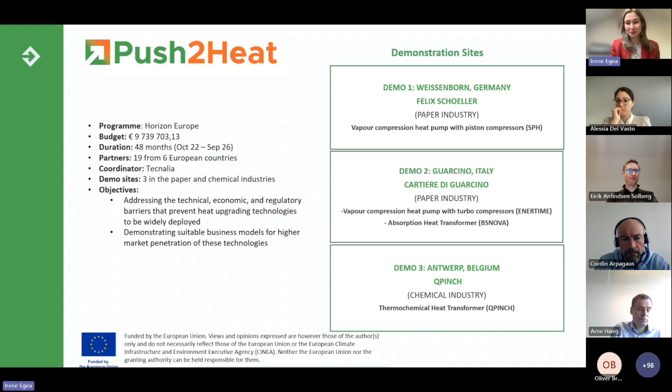So last but not least of the projects that are organizing this event, I am talking about SUSHEAT, which will last 48 months. It's the youngest of the projects, I would say. It started in May 2023, and it has 14 partners from different European countries, including affiliated countries of Norway and the UK. And the coordinator is UNED.

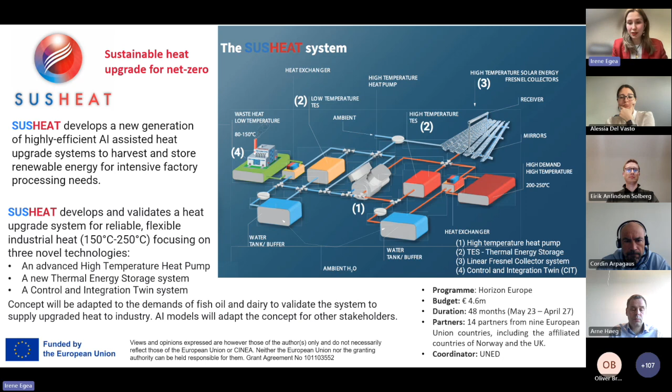And now, yes, the time has come to let the speakers start speaking. So I'm glad to introduce the first speaker of today, my colleague Alessia Del Vasto. Alessia graduated with a Master of Arts in EU Public Policy and Administration at Maastricht University. Prior to joining EHPA, Alessia worked at the NGO Positive Money Europe, dealing with central banking and sustainable finance for over 3 years. Previously, she worked at the European Economic and Social Committee and at the European University Institute in Florence. And she joined EHPA in June 2022, covering policy and lobbying work with a specific focus on refrigerants. So Alessia, whenever you're ready, the floor is yours.

Great, thanks, Irene, for the introduction. Very glad to be here today and discuss with you what the EU is doing or not doing on the policy side. Indeed, I am focusing on refrigerants, but recently I have been joining the industrial heat pump group of EHPA. So I have been chairing the group, etc. So that's why I'm here. I'm gaining more and more knowledge on the topic, and of course it's extremely interesting, and it's gaining more and more momentum, as we will see later.

I wanted to say a few words about EHPA. We are 24 years old, and we have 220 members across 30 countries. So not only the European Union, but also beyond. So we have a few members from the UK, Turkey, Norway, and Switzerland. We're based in Brussels, working with the EU institutions, advocating for heat pumps, but also cooperating at the international level with the Chinese Heat Pump Association, the International Energy Agency, and so on.

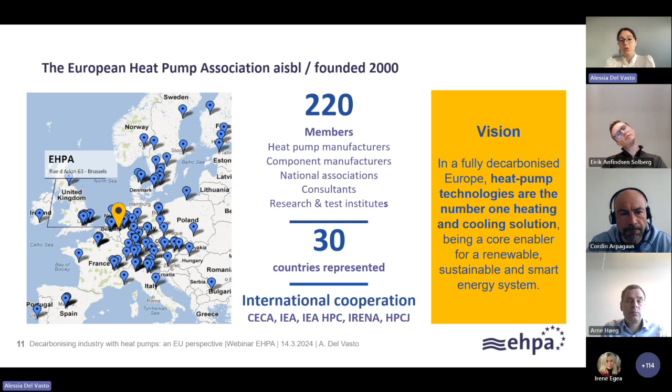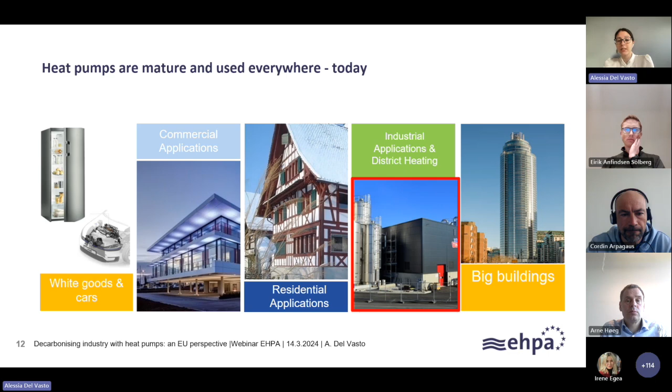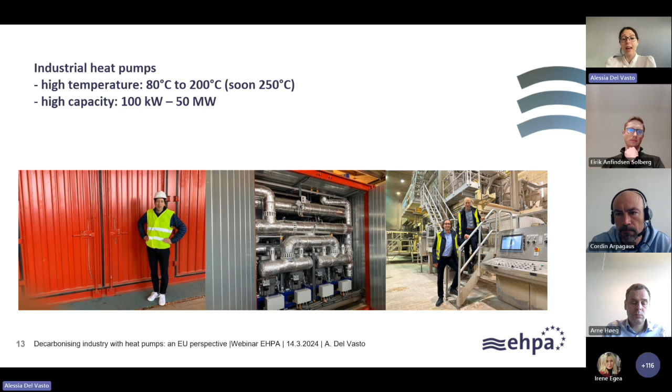So now everyone knows heat pumps are mature, let's say, and they're used everywhere, not only in white goods, not only in cars, not only in commercial applications, office buildings, commercial buildings, residential buildings, but also in industries, also in factories and so on. And that's what we're going to talk about today. We know they have reached quite high temperatures, soon 250 degrees, as my colleague Irene was saying. We have high temperature heat pumps that reach 200 degrees, very high capacity from 100 kilowatts to 50 megawatts. So it's pretty great and helps decarbonize the industrial sector.

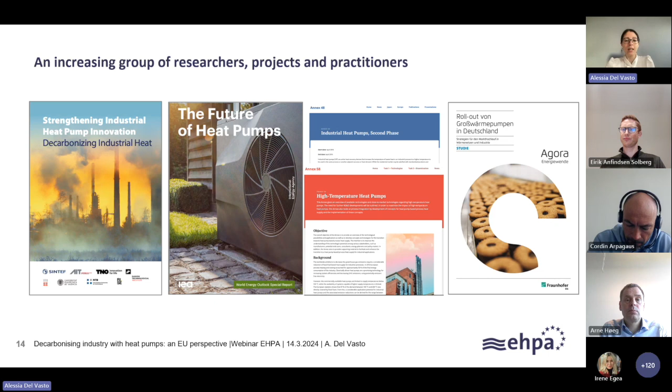Indeed, as I was saying, we're gaining more and more momentum. Everyone is talking about it, not only researchers. So there's of course a lot of focus from academics, but policymakers are also getting more and more interested in that. The IEA, you can see here, wrote a report on the future of heat pumps, and the World Economic Forum recently published an article as well on decarbonizing the industrial sector in the EU via electrification. And of course, there is a huge focus on industrial heat pumps, on the role that industrial heat pumps can have in decarbonizing the industrial sector.

So as we know, industrial heat pumps and residential heat pumps in general work with an energy cycle. And what we talk about here is that we need to close the energy cycle, and we need to make sure that waste heat is available in sufficient quantities and it's actually reused in commercial processes. It's not wasted, as the word says. It's used in new buildings, as well as in process design.

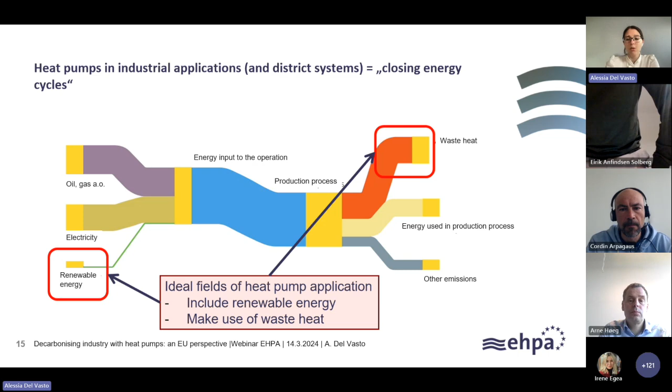And when we talk to policymakers, whether at national level or at EU level, what we want as EHPA is that waste heat is taken into consideration and it's finally seen as an opportunity. We will see later what we mean about that. So, let's talk about what the European Union is doing with regard to industrial heat pumps.

Maybe it's worth it to mention first the EU Energy System Integration Strategy, which was published back in July 2020. It was accompanied by a consultation with stakeholders, including, of course, the heat pump industry. The strategy says clearly, industrial heat pumps can help decarbonize the low temperature heat supply within industries and can be coupled with waste heat recovery. There's a mention of waste heat, of course.

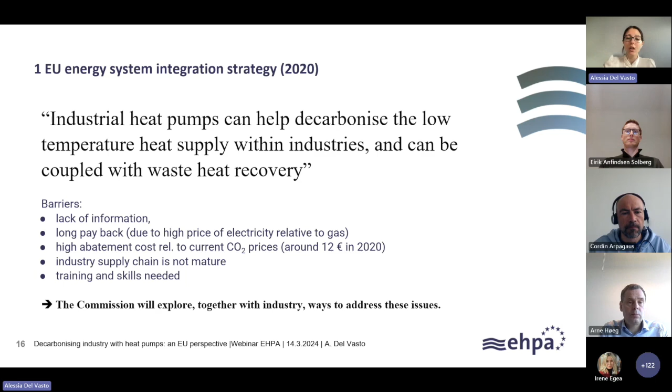And the strategy also acknowledges a few barriers here and there. The lack of information, long payback, training and skills are needed in order to step up the rollout of industrial heat pumps. As EHPA, we talked about training and skills a lot. We talk about, of course, accelerating the rollout of heat pumps. But in order to do that, you need well-trained and skilled installers. You need to carry out a few policies in this regard, and one of them is making this job attractive to the population, to young people, etc.

So one of the greatest recognitions for heat pumps, including industrial heat pumps, came last year with the Net Zero Industry Act. Heat pumps are recognized among the key clean technologies to carry out decarbonization in Europe. This was quite a big recognition, which led also to us handing over our heat pump accelerator report to the European Commission themselves.

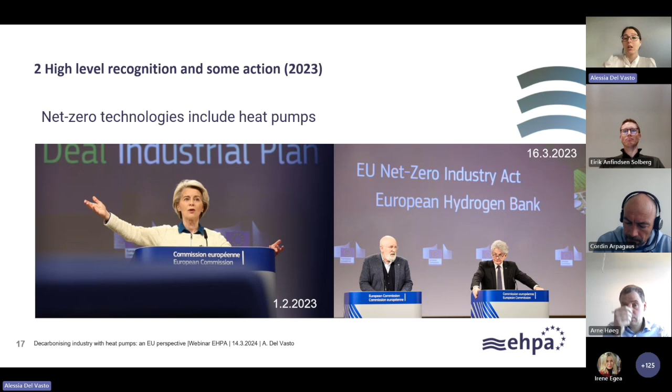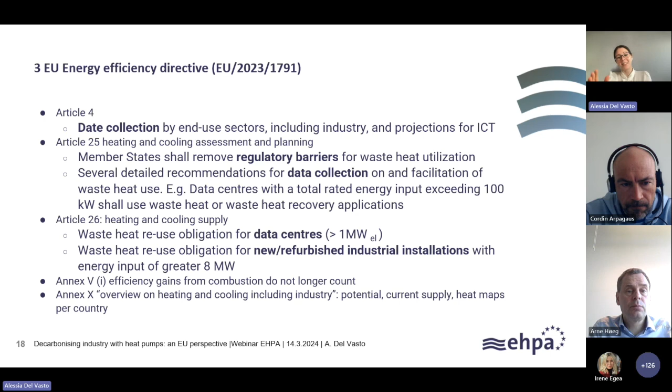And it's worth mentioning as well the EU Energy Efficiency Directive, which goes a bit further and focuses on data collection by end-use sectors, including the industry. It goes to the planning. It says clearly that member states should remove regulatory barriers for waste heat utilization, etc. So it goes a little bit further, and indeed, it was a step forward in recognizing the wasted opportunity of waste heat recovery.

The Renewable Energy Directive instead created a legal framework at the EU level for the development of clean energy all across the EU economy. The EU really wants to be a global leader in developing renewables. In 2022, the share of renewables was around 23%. The goal is to bring it to 42.5% by 2030.

In the recitals, it mentions the opportunity brought by industrial heat pumps, how they can help decarbonize the sector, at least when it comes to low temperature below 200 degrees. Member states are invited to promote electrification via industrial heat pumps. And once again, it's said very clearly that waste heat is underused. Its role in a wider framework is to mainstream renewable energy in industry, but also in Annex 4, it's clearly said that training should be adapted to the requirements of industrial installations. As we were saying, this is key to carry out the rollout of industrial heat pumps.

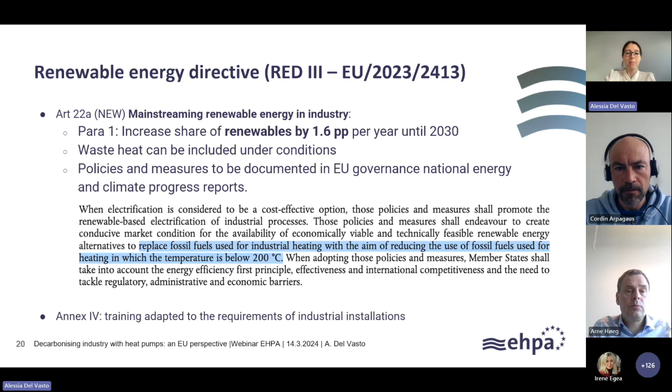And it's clearly said once again that we should replace fossil fuel use for industrial heating with renewable energy, and with industrial heat pumps when it's possible. The directive also mentions that member states should track the progress in specific reports that are then handed over to the European institutions, so that we can see what went wrong, what went right, and track the progress for every member state.

Now it's time to talk about the F-gas regulation. Let me talk about it for a few minutes, because it's particularly relevant at this stage. You probably know the F-gas regulation was published at the end of February and came into force this week on the 11th of March. So indeed, it's quite relevant. Everyone is talking about it. There are a few aspects that have been clarified. A few others have not been clarified yet, and will be clarified through implementing or delegated acts throughout this year, probably even before the summer break. As EHPA, we are closely monitoring these developments on the F-gas regulation.

What's new in the F-gas regulation? The HFC phase down is steeper than in 2015, and the objective is to reach zero HFC by 2050. You know, the EU has to reach climate neutrality by 2050. So eliminating HFC should be read as an objective of the EU in the wider framework of climate neutrality, so to say. There are new prohibitions, of course. We will look at them in a minute.

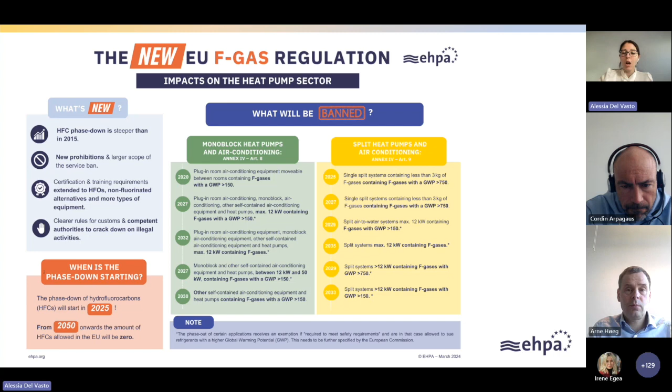There are exceptions in case of safety, but this needs to be further clarified, considering all the differences across member states regarding safety exemptions and the use of specific refrigerants under specific conditions. We have identified a few barriers already: knowledge and trust, the lack of infrastructure, and complex integration, integrating energy carriers with the key technologies, etc. That's particularly important as well.

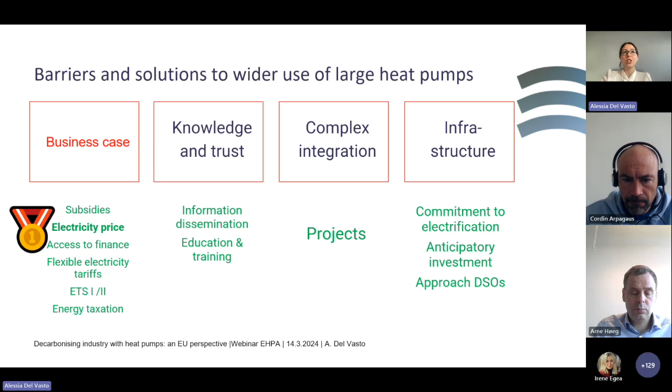But what I want to conclude this presentation with is electricity price. We really believe that at this stage, the price ratio between electricity and gas must absolutely come down. EHPA specifically calls for the price of electricity to be no more than double the price of gas. We support carbon pricing and policy instruments that in general shield citizens from electricity price spikes.

We need to make sure that for industry, citizens and consumers, heat pumps become a rational choice from the economic point of view: reduce the electricity and gas price ratio, but also reduce upfront costs, boost financial tools to reduce such upfront costs and make it easier to access loans, green loans, renovation loans, subsidies, etc. We have identified barriers, but we also offer solutions.

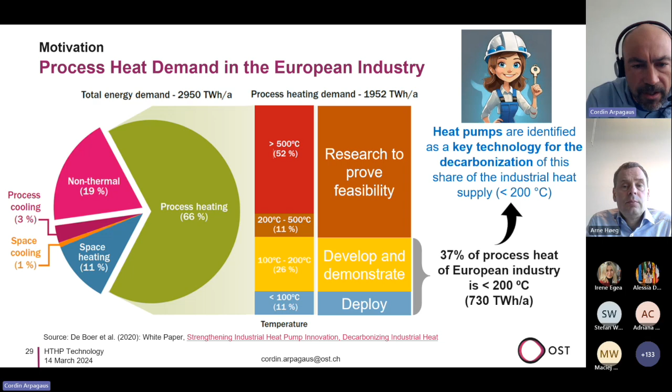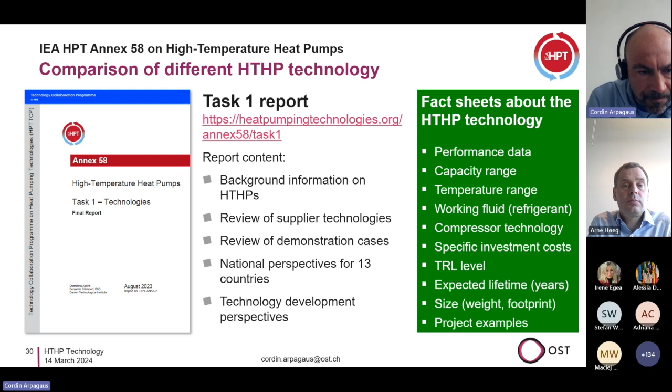So it's around 37% of the process heat. So heat pumps are a key technology to decarbonize industrial process heat, just as an important fact. So then we have IEA Annex 58, where we participated also as a Swiss university. There were several countries participating, and we are developing task reports. And the first Task 1 report is about high temperature heat pump technology. This report is available for downloading, and it has very valuable information, and I will use some of it for today's presentation.

I generated this slide here. It is an overview of many heat pump suppliers which are now active in this market. The left graph is the illustration of the temperatures that can be achieved as a function of the heating capacity, and in color the compressor technology. So you can see these machines are providing heat higher than 100 degrees, up to 280 probably, when we include as well vapor recompression technology, so open cycle heat pumps. So the message here, the market is evolving. I would expect probably 5 new companies every year.

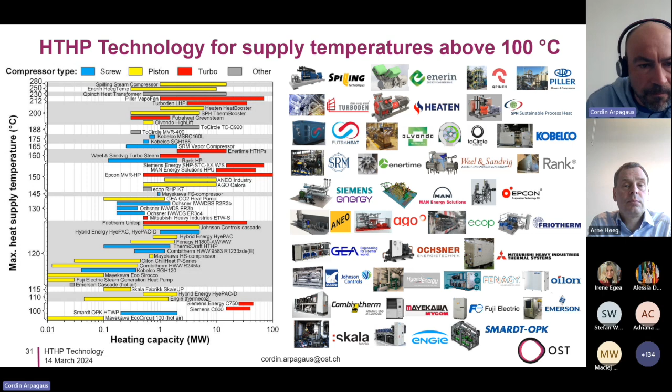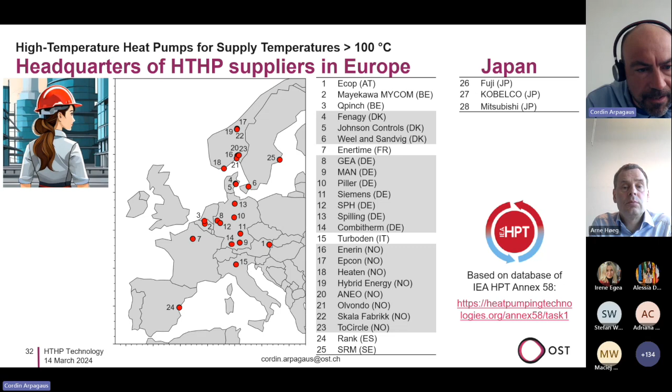The companies are located in different places with headquarters in Europe. You can see here main companies in Norway or in Germany and some other countries. And for sure, there are others around the world which were not participating in this Annex project. Important is the technology readiness level as a measure of the maturity of the technology. For high temperature heat pumps, we also see such a distribution of the products in these technology readiness levels. Readiness level 7, 8, 9 is very close to commercialization. And here, the heat pump suppliers are pushing their products towards higher TRL level.

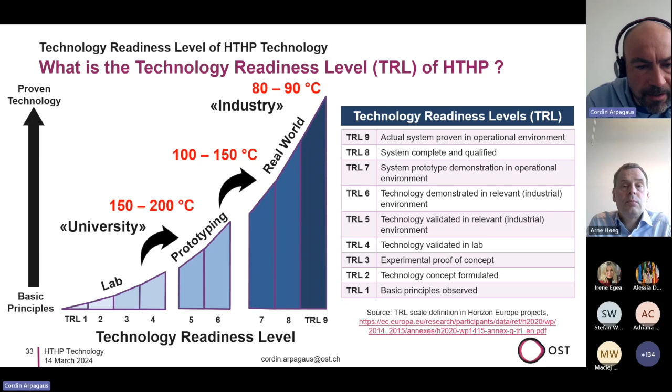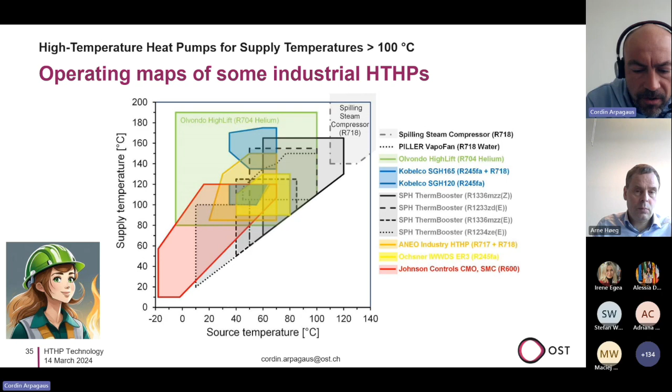Important for an end user is the operating map. And here we have some of these operating maps illustrated as a function of heat source temperature and heat supply temperature. And you can see there are several products which can provide, let's say, 120-degree heat from a waste heat of 50. So here you have quite an overlap of operating maps, which is an interesting spot and an interesting range for various applications.

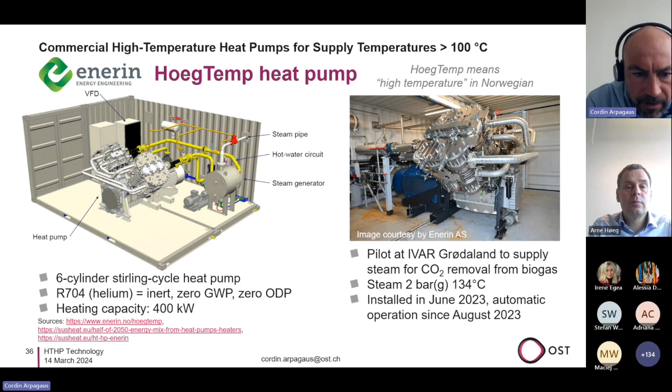I have now 3 companies I would like to focus on a little bit more. Enerin, we have Arne later on with a presentation. The interesting thing of the HoegTemp heat pump is that it is working in a Stirling cycle with helium as a refrigerant. Helium has the advantage that it is a noble gas with no problems for the environment, no ODP, no GWP. So this technology is close to market. On the right, you see a demo pilot installation in Norway to remove CO2 from biogas. They need steam. So this machine is producing steam at about 2 bar gauge, 134 degrees, and it is now running and in operation.

Important is that the machine is isolated. So you see here the isolation for the compressor, and at high temperature, the waste or the radiation can be substantial. So that is an important measure.

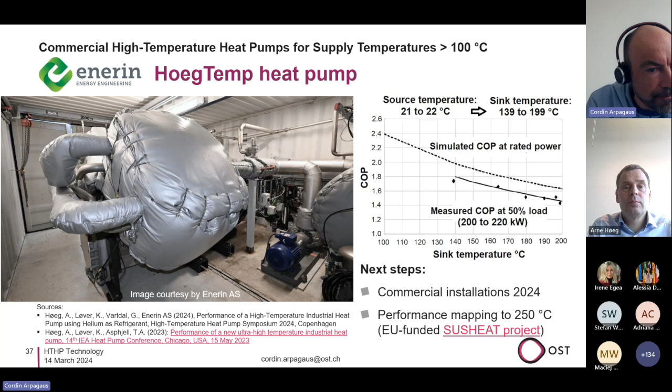still the COP is in a range of 1.8 to 1.6, so 1.8 times more efficient than an electrical heater. Then this company is SPH, Sustainable Process Heat, in Germany. They are providing a steam generating heat pump called ThermBooster, based on a piston compressor, 4-cylinder, with a quite modular design, so to fit different heating capacities and also temperatures.

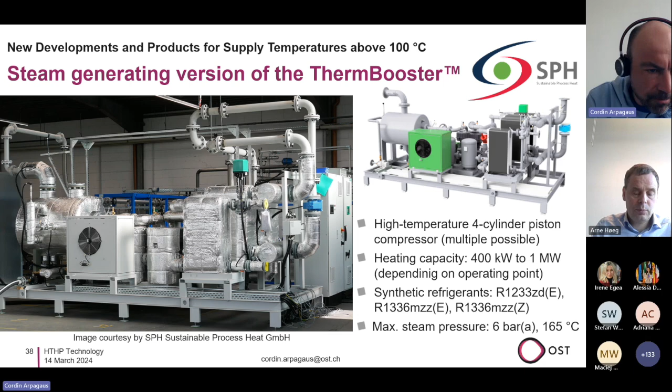The refrigerants can be selected between HFOs, but also hydrocarbon refrigerants like butane or pentane. So this is a heat pump that can generate steam. And here you can see an overview of a laboratory for testing the ThermBooster.

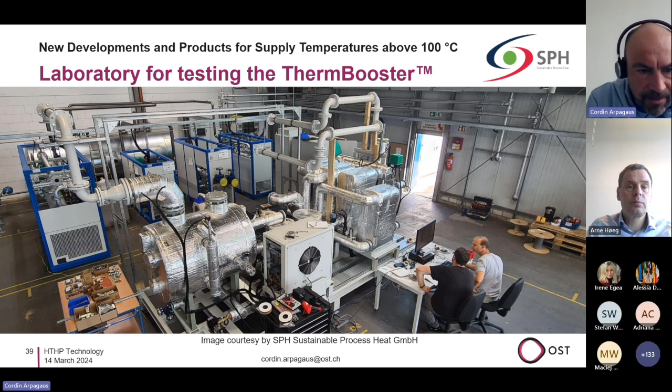R515B, and second stage R1233zd(E), so 2 synthetic refrigerants using piston and screw compressors. The source is the waste heat, or the humid exhaust air from a dryer, from the paper machine dryer, and it is then upgraded to steam, low pressure steam at 2.2 bar absolute. The capacity is over 1 megawatt.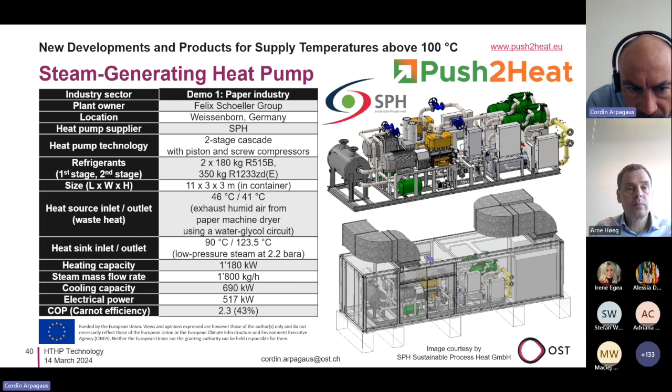So a very interesting setup. What you can see on the left here of the SPH heat pump is the steam condenser, and the steam generator or condenser is from Vahterus, a Finnish company. You can see here the design.

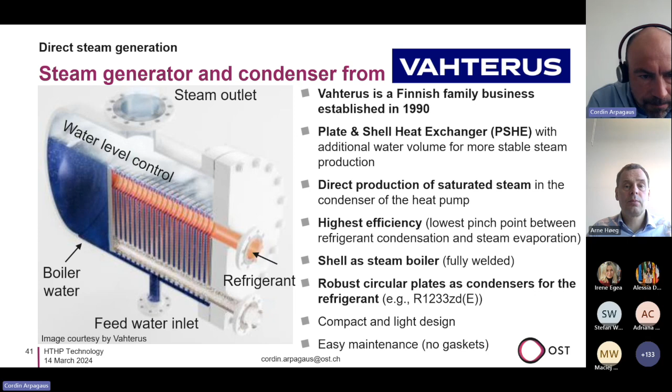So it's a plate and shell heat exchanger where the refrigerant goes in from the right here, and it is condensed and comes out again on the right. And the feed water or the water inlet is from the bottom, and it is heated up and then evaporated to steam. So there is a water level control, and the shell is the steam boiler in this equipment, and it's quite a robust design. So we'll see probably many applications of this plate and shell heat exchanger in the future.

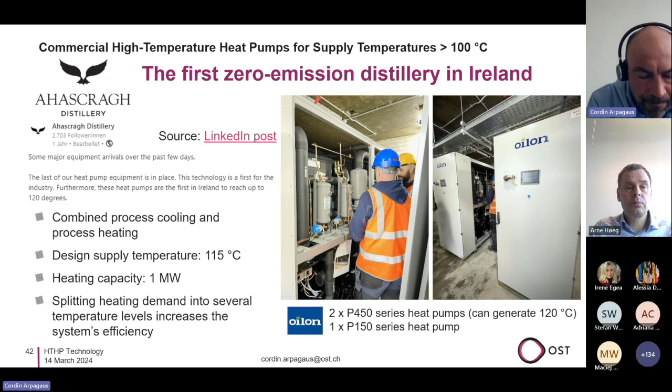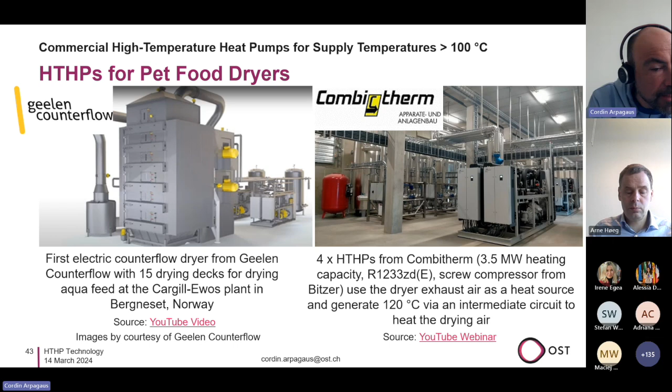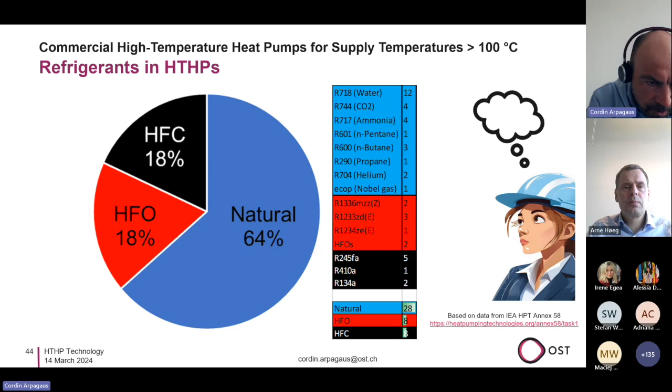From the refrigerant point of view, we see a trend towards natural refrigerants, where we also would count, for example, helium. But there are the hydrocarbons, ammonia, water, CO2, and then the HFOs in red, which still have application. And also in the next years, there will be several heat pumps using this refrigerant. The HFCs need to be replaced probably by HFO refrigerants.

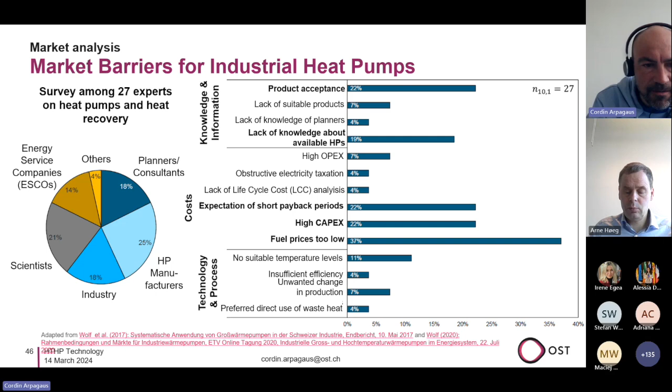Product acceptance is another important barrier. The end users need to be convinced that the machines are reliable, and they need a demonstration that this works. So from market adoption with industrial heat pumps, we are still at a very low percentage. Maybe 1 of 100 companies, 1%, has an industrial heat pump so far. So there is a big need to push this technology to a higher adoption level.

Subsidies and funding programs are in place in many countries to push this technology. In blue, you see the heat pump adoption for residential heat pumps in Switzerland. You see it reached already 65%, so it's over the majority. This is state-of-the-art technology for heating houses. And in industry, there is still a lot of work to do.

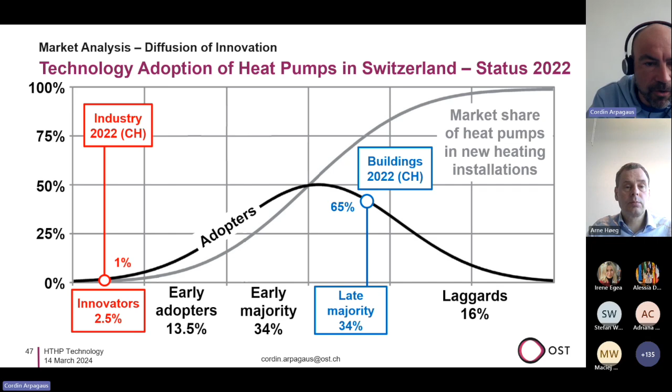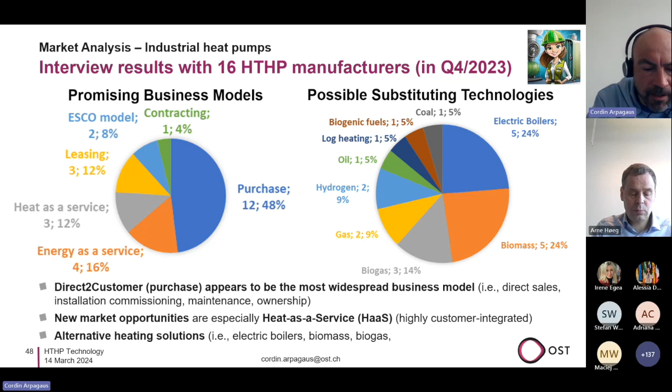Then there are other technologies which are in competition with heat pumps, especially electric boilers or biomass, biogas, and some other technologies. This has to be taken into account, especially when evaluating the economic situation.

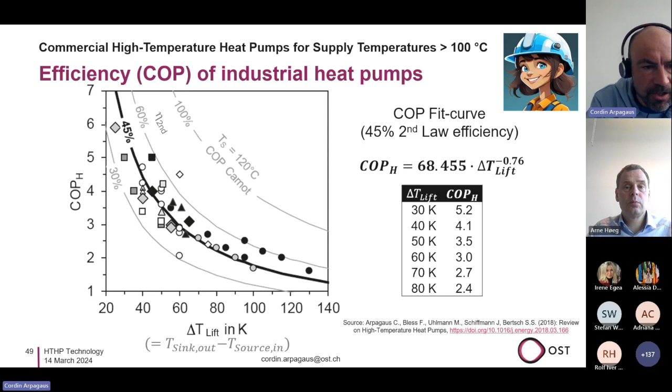The COP, the efficiency, is clear. There is a relationship between the temperature lift and the COP. If we would go to very high temperature lifts between source and sink, we would reach a COP of 1, which is in principle an electrical heater. So the temperature lift needs to be in a range where we have a benefit from the heat pump. A COP of 2 or 3, this is what we want to have. So the application needs to be a suitable application for a heat pump.

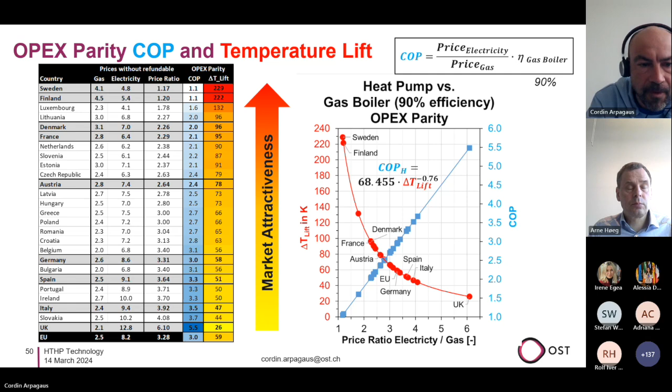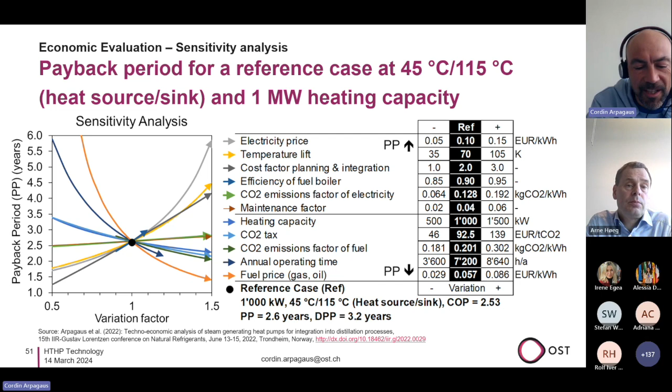The influencing parameters are there. It's just a question of the local situation of that end user, and especially also the investment costs for the heat pump and the whole project.

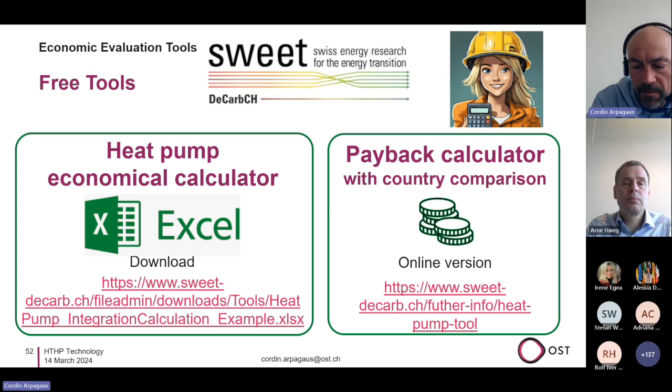From OST, we have generated some free tools for heat pump calculation. Here, an economic calculator: you could download this Excel file, or also a payback calculator, which gives a country comparison. So maybe it's useful for you to have a first guess of the economic situation.

So as a summary: all together, here we have many products. We have seen this from the IEA Annex 58 project. Several heat pumps are very close to market and some already commercialized.

Application examples: we have seen some realized examples that generate steam, hot air, or pressurized water. The economic situation depends strongly on the price ratio, but also on the temperature lift. It needs to be a suitable application for a heat pump. Then there are some countries where these conditions are more favorable than in others in Europe.

From the business models perspective, purchase is very often seen, but in the future heat as a service could also be attractive. From the refrigerant point of view, we have seen that before: F-gas regulation pushes the refrigerants towards natural refrigerants or refrigerants with very low GWP.

So finally, I hope that you have confidence in high temperature heat pump technology and give heat pump technology a try.

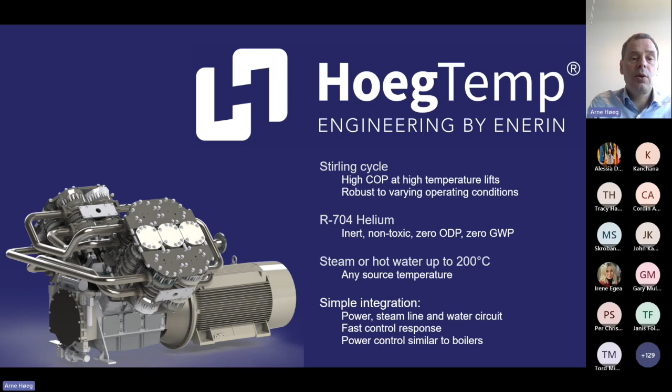Basically power in, heat source in, steam out. We can also deliver hot water directly, or thermal oil instead. So it's one process, one refrigerant for any temperature range. That means that if the customer has a 170-degree hot water circuit or an 8-bar steam system, if in the future they find that they can lower the steam pressure or the temperature, the heat pump will still be able to deliver the same amount of heat, but with better efficiency. So no need to wait for the next redesign of the plant to go for a heat pump. Just add the heat pump and do the changes in the plant later.

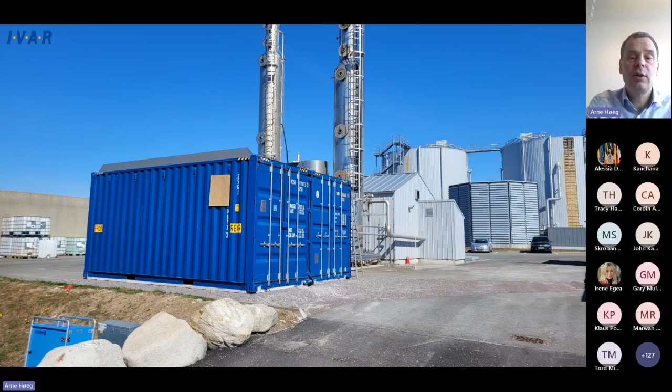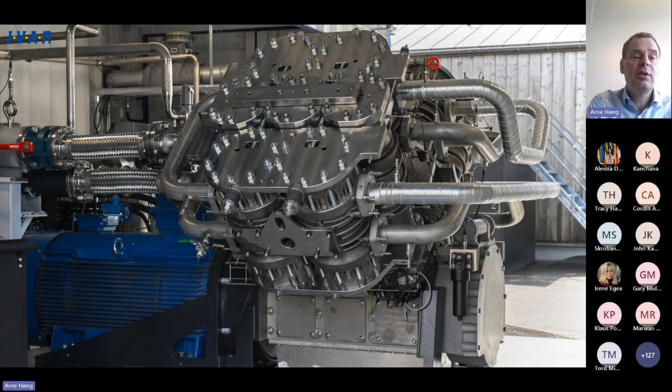But the new test rig that is being built at KTH in Stockholm will be able to handle up to 250 degrees on the hot side. So then we'll be able to map the performance up to those temperatures.

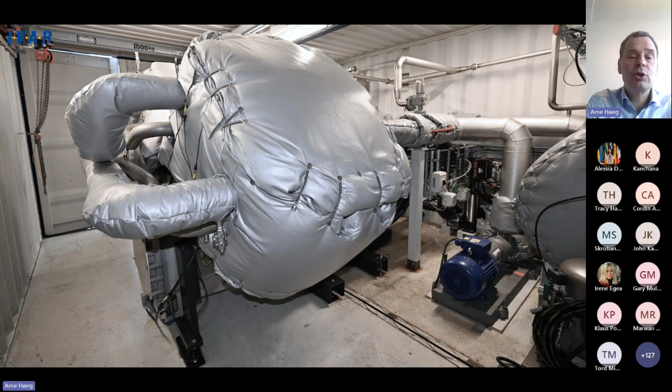I'll also add an additional benefit when replacing oil and gas with heat pumps. So one thing is the factor of maybe 3 in energy consumption, but the other is that you also reduce the strain on the energy system.

So many plants are constrained by the cooling system or the waste heat circuits. So probably in the summer, the capacity can be affected by those constraints. So adding a heat pump, you not only save energy, but you reduce the strain on older systems in the plant, and you will also be, let's say, insured against high gas prices.

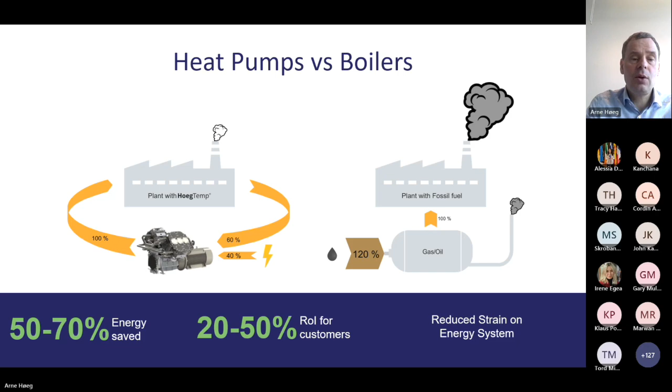Going into, let's say, the efficiency. So we have the COP, obviously, but looking at the Carnot efficiency, we see that especially at very high temperature ratio in kelvins, the HoegTemp heat pumps will be more efficient than other heat pumps. So that's especially interesting for the next frontier with the very high temperatures.

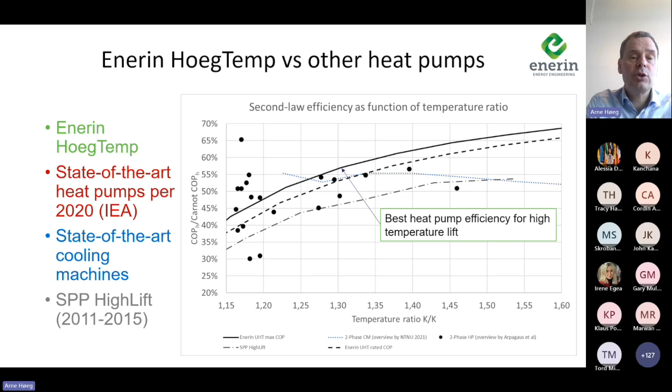So summing up the heat pump technology from our side is that the HoegTemp will be the best solution for the very high temperatures and for the high temperature lifts, but also for varying conditions. So that's very important. Not all companies and all plants have stable temperatures and energy consumption. So if the conditions vary, this type of heat pump will also be a very good alternative in the low range with the higher COPs.

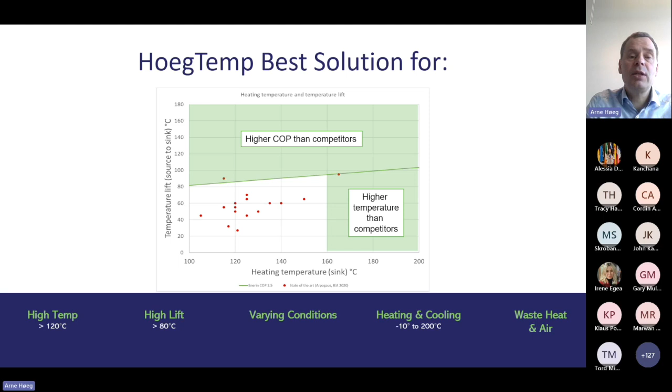So at Pelagia Måløy, we will be installing 1.6 megawatt of HoegTemp heat pumps. So the first step is 400 kilowatts this spring, and we'll then build out to 1.6 eventually. So when integrating this heat pump into the plant, we looked at the energy flows and everything. We have a very good tool to monitor energy use.

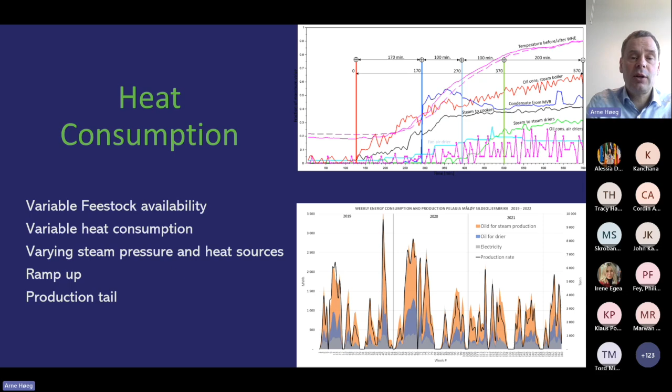So we looked at this energy demand here, it fluctuates quite a lot, and also in the ramp-ups, all the different flows and machines are turned on so that nothing is very stable. Also, the heat sources are at different temperatures and levels, and we found that the average Carnot efficiency will typically be 50 to 60%.

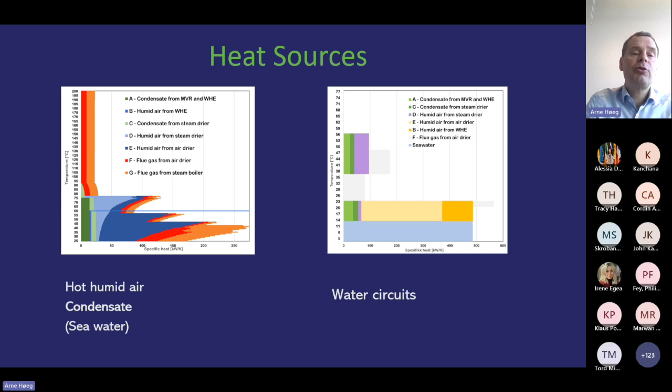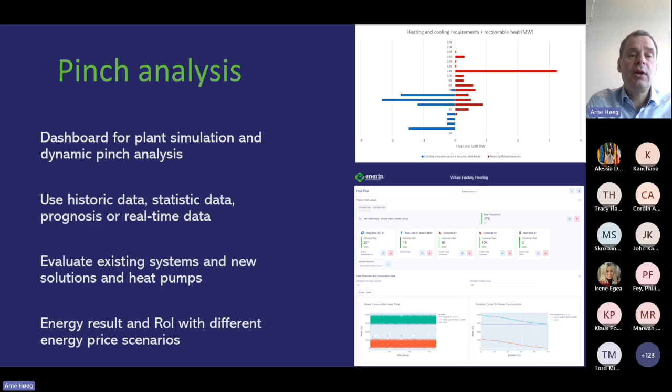So we had to do a pinch analysis. We do a dynamic pinch analysis so that we can watch how the pinch point fluctuates from minute to minute. So we have built a digital twin of the plant, and then we can see how best to integrate the heat pump.

Also, we see here we have the temperatures at Pelagia. So we have the heat sink temperature, 8 bars or 5 bars. So that's the typical variation of the steam pressure. And the heat source can be anywhere between 10 and 80 degrees for waste heat, but also seawater is a possibility as a heat source.

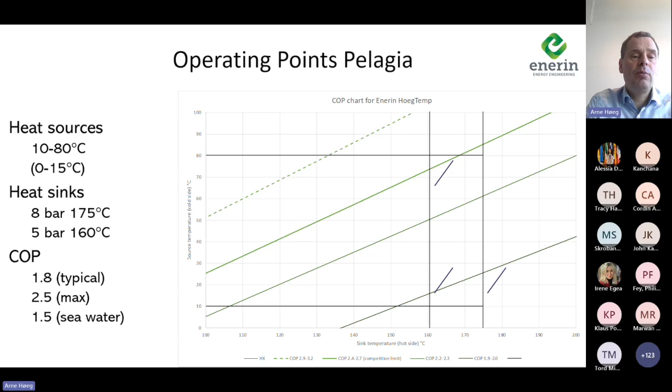And then we see these 3 lines here are the typical operating points that we will look at. So for a low heat source, high pressure, and then lower pressure steam, but still a low temperature heat source. And then we have the high heat source and low steam pressure. That means we will typically be at a COP of 1.8, but at times we can do 2.5. And then at ramp up, we can utilize maybe cheap electricity to also use the low COP values there.

The capacity is from the smallest one, 200 kilowatts. The largest module is 1 megawatt. So the heat pump that we will install here at Pelagia will have a maximum heating capacity of 1 megawatt. So it's very silent. I mean, it's no problem to speak in a normal voice beside the heat pump when it's running at full power.

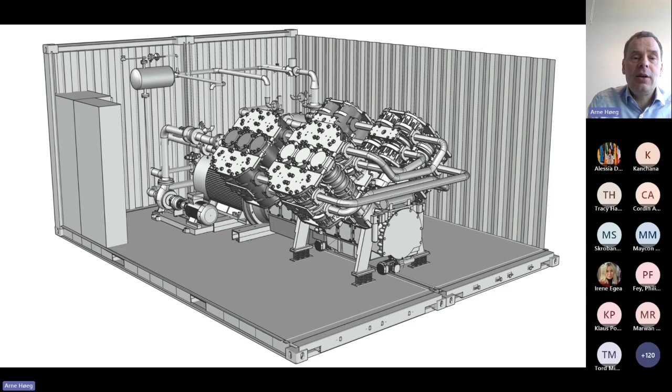So other than that, it's approximately 1 million euros per megawatt. That's the standard price. And then we have operating contracts, and they start at approximately 1 euro cent per kilowatt hour saved energy. So that's then more or less the typical level.

That means that in most markets with high gas prices and low electricity prices, or if you're able to utilize storage so that you can use the cheap, abundant renewable energy, then a 3-year payback should be entirely possible.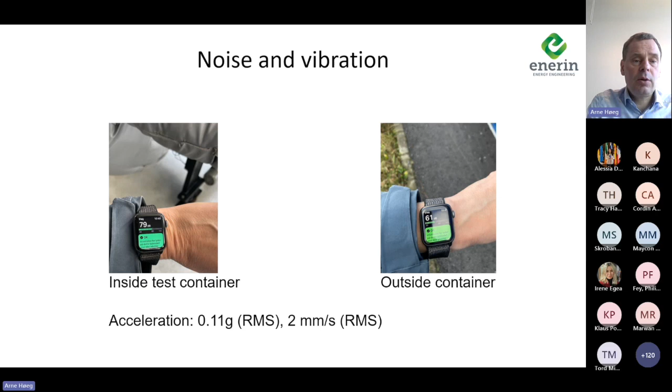So yeah, just to sum up, well, we have the technology to decarbonize the industry today. I think we meet most of these barriers that people see. There was a question, let's see.

So, Elin, we are 10 people at the moment. We are interviewing 2 more people now to hopefully start before the summer. So there will be 12 employees, and we plan to recruit more people later this year.

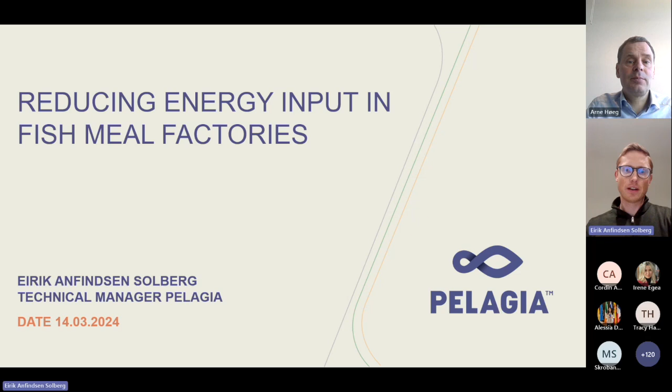Yes, as Irene mentioned, I work at Pelagia, and we are working very hard to reduce the energy input of our factories. A little bit about Pelagia. We are a leading producer of pelagic fish, which is mackerel, herring, blue whiting, and others. We have headquarters in Bergen, Norway, where I'm located now. And we have around 25 production facilities, mainly in Norway and the UK, but also presence in Denmark and Ukraine.

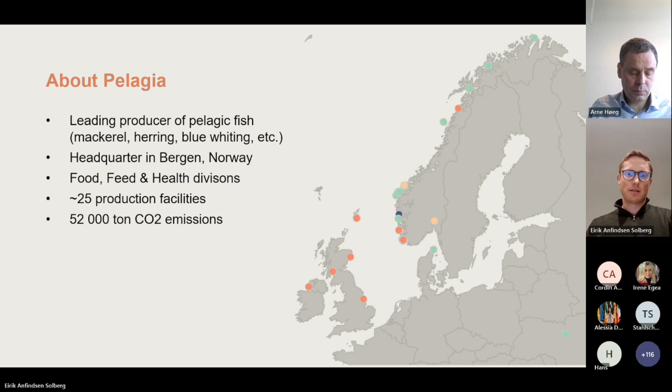In Norway, we have a yearly CO2 emission of around 52,000 tons, which we would like to reduce. Our key products are food for humans, that could be fillets or frozen fish. We have a feed department that produces fish oil and fish meal that goes into animal feed, mostly to the salmon industry. And we also have a health department which produces omega-3 oil for pharmaceutical and nutritional industries.

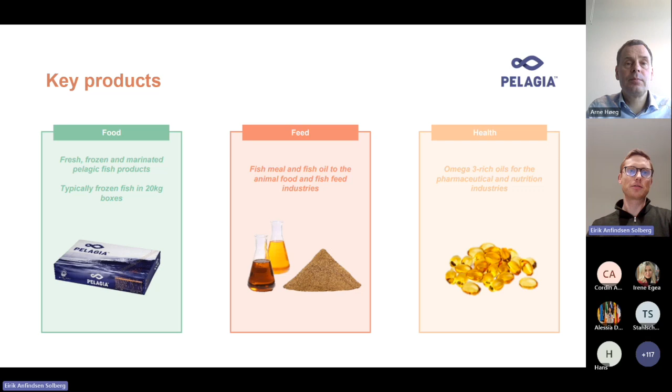Since we are a big energy consumer, at least the feed industry uses the most fossil fuels, we have a continuous and increasing focus on energy in Pelagia. We also have factories of different age, so we have different things we can do, like optimizing the operation and cleaning routines for equipment. These are easy things to do. And we also have different types of fuels and energy we use at our different facilities, so we need different strategies at every plant.

We also try to exchange experience between our factories, and, like we talk about today, contribute to innovation and facilitate industry trials at our plants. So we are a contributor in several projects on heat pumps and energy, both in Norway but also EU projects like SUSHEAT, which we are here on behalf of today.

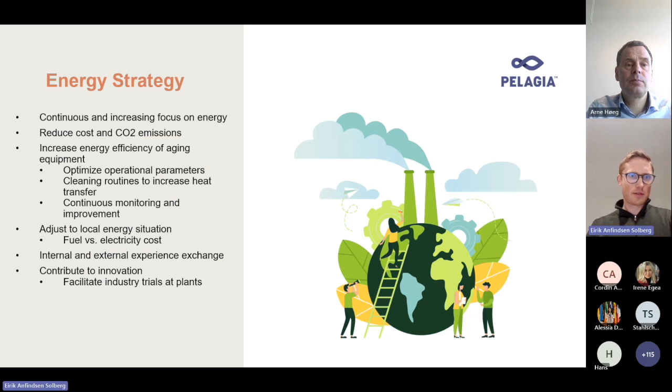Let's see. Just a quick overview of a general fish meal factory. The whole point of the factory is to take in raw material, fish, and separate it into solids, that would be the meal, oil, and water. So we're trying to remove the water and sell the products, which is meal and oil. And this demands a lot of energy, mainly in the form of heat.

So the biggest consumers here would be the cooker and the two dryers. We have one pre-dryer that uses steam and a final dryer which uses hot air. We also have these waste heat evaporators, but they operate on waste heat from the dryer steam.

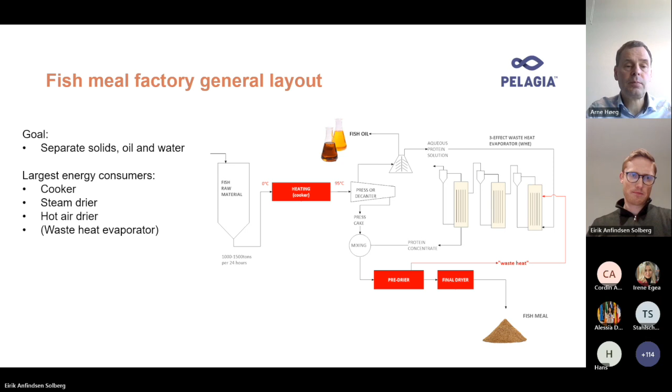So since we have a lot of waste heat from many of our processes in the form of steam from our dryers, we have surplus steam from our dryers. This will be used in the heat pump system, and we also have dirty condensate from cookers and dryers, both from the dryers and waste heat evaporators. This will also be used in the heat pump system.

So we are at Måløy. We are currently installing systems from two different contractors, Aneo and Enerin, that Arne presented just now. The reason that we have two different vendors is that they are different systems with different temperature lifts. So we use the correct technology for the energy lifts that we need. For the smaller energy lifts, we will use the Aneo system, and for the larger energy lifts, we will use the Enerin, to get the best COP that we can in total.

So the way it works is that we have dirty steam from the dryer. That is steam from the fish that has evaporated. We take this into a heat exchanger, actually a steam heat exchanger, so we get out clean steam on the secondary side. This is a vacuum steam at around 80 degrees or so. And this merges with the steam produced at the ammonia heat pump here. This steam is generated from condensate of around 85 degrees.

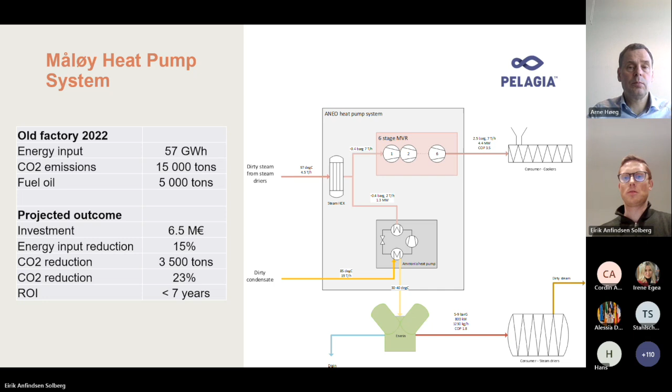And the return on investment we expect to be less than 7 years, but this will depend on both electricity prices and cost of CO2 emissions in the years to come. So in the future, like Arne said, we are starting with one Enerin heat pump, but we have the space to build out with several more if it turns out to be a success. And then we will be able to produce steam for more of our dryers.

We're basically using all our waste heat today, so we will have to introduce seawater as a heat source for the next heat pumps. And together with SUSHEAT, they are using our factory data that we have provided them with, and they are looking into simulation of control systems and machine learning algorithms to optimize the production in our factory.

In SUSHEAT, they're also looking into storage of energy. Since our factories, like Arne showed in the graphs, don't have a stable energy usage, we have to use the energy when the fish arrives. So we are ramping up and shutting down production many times a year. And that would be a very good place to test out thermal energy storage as well.

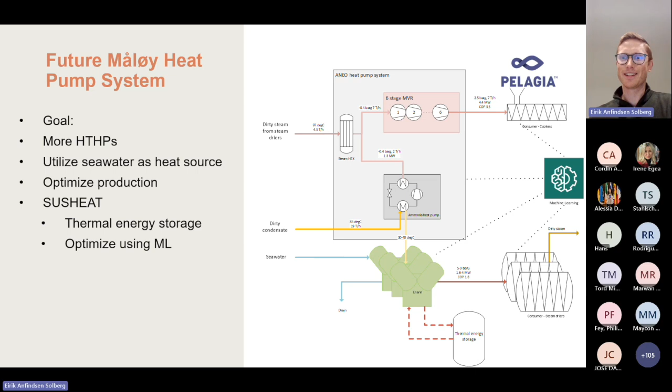So now, before we start with a very brief Q&A actually, because we are running out of time already practically, I wanted to ask you all, what's your energy level as of now? So I'm just gonna launch a poll, and of course, you're very much welcome to just share with us how you are feeling. I see the energy level is pretty high. That's great. I mean, weekend is coming very soon, so I understand.

But okay, as I said, we don't really have that much time for questions, but I think it's a good opportunity since we are all here. I wanted to start with a question for Cordin. You briefly mentioned barriers, I know, but it's always interesting to hear what are the main barriers, but also the main drivers for the market introduction of high temperature heat pumps.

Yeah, this is a very good question. We have seen the barriers in several presentations. One is the prices of gas and electricity, then the reliability and availability of such heat pumps in realized examples. Then we have seen the training and the skills of the installers. So we need a lot of people that are trained on these systems. And the benefits, it's all about decarbonization, electrification, saving energy, CO2 reduction. This I would mention here.